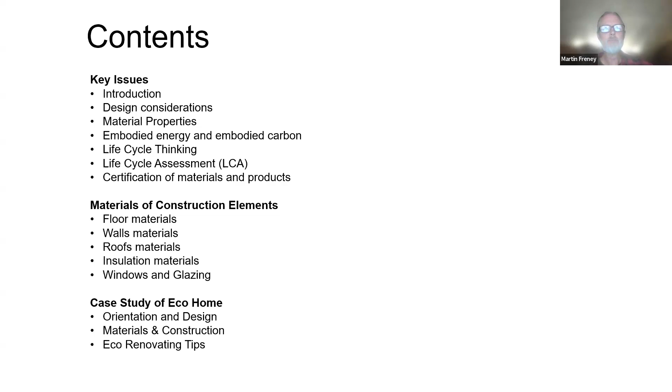To start with, it's good to acknowledge that in the past, people built with what was available. These days we've got a globalized economy where we can get materials from all over the world. But building with local materials, the materials at hand, is indeed a very ecological way to build. I know what you see on the screen doesn't seem very practical, but you can indeed, even these days, build with local materials. I'll give you some examples as we go through.

This presentation is about materials, and I'm not going to talk too much about design, because there are other webinars on that topic. But I will touch on it from time to time, because it's almost impossible to talk about materials without talking about design. So I've got some questions here: what will we build, and how will we build it?

We can't talk about design without talking about the designers, which are you and me. We all have ideas about how we want our homes to be and what types of materials. These decisions we make have a massive impact on things like the cost of the home, and in particular, a really important one: how much is it going to cost to run? Of course, how much is it going to cost to build? But also increasingly, people are thinking about what are the ecological impacts, and that's what I'm going to be talking about a lot tonight.

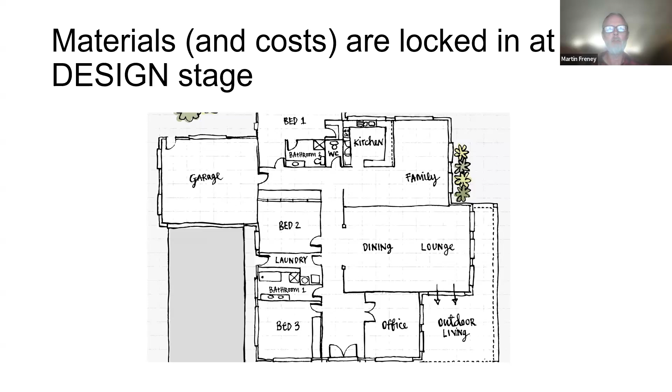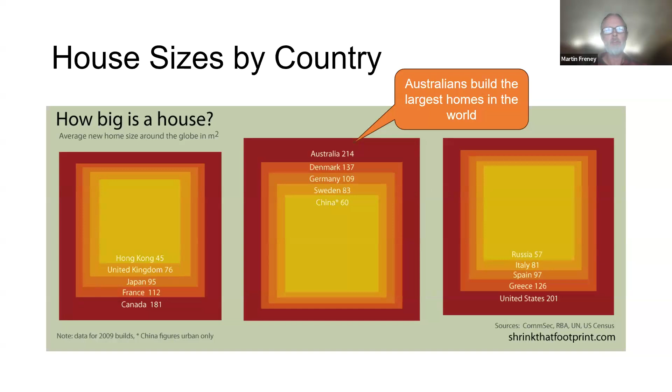That's approximately a third of the size of our homes, so please keep that in mind. Important to understand, big houses need more energy to heat and cool, and of course they need more materials to build and cost more to build. So if you are on a budget, it does seem to make sense to consider this size issue.

All right, so design and approval. There's a team of people working together to get you approval for your build, and this is where materials are going to be locked in. All of these people are going to have some impact on the materials you choose, whether it's the energy assessor having specifications for your glazing, hopefully double glazing, or the structural engineer specifying the strength of the timber or the steel.

So it's kind of a team approach, and these materials, it's a little bit out of your control as the owner of the building, and you'll need to take the advice of these experts on what are the right materials for your home. But right from the beginning, you can start out by saying these are my preferences for the types of materials I want you to work with. An example might be, do you want a timber framed home or a steel framed home?

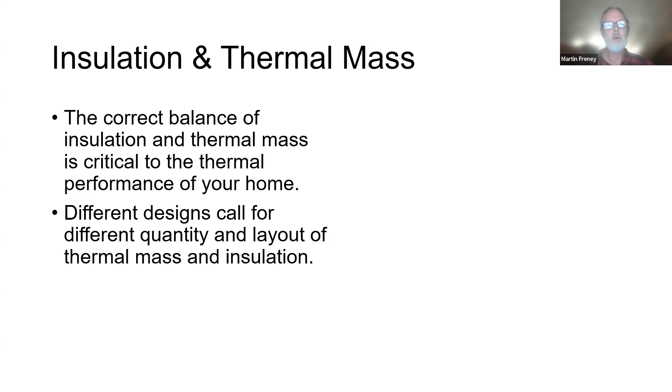Now, perhaps one of the most important material properties is this concept of insulation and thermal mass, and they're really at opposite ends of the spectrum. Insulation and thermal mass are really the ingredients that are going to determine whether your home is energy efficient and therefore nice to live in without relying too heavily on things like air conditioners. Different climates and different designs are going to call for different amounts of insulation and thermal mass, and indeed the construction codes and standards are going to specify minimum amounts of insulation in particular. So let's have a quick look at these two things.

So insulation, I'm sure most of you are familiar with this concept that it slows down the flow of heat. It's good to understand that heat flows from hot places to cold places, so if it's warm inside and cold outside, the heat's trying to escape. It's measured with something called R value and also U value, and I'll explain these two things as we go along.

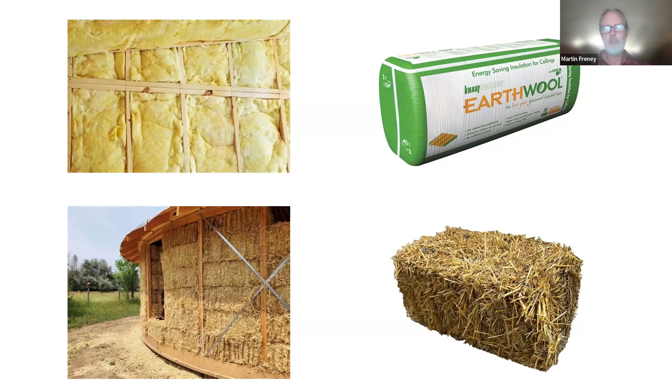Obviously, the conventional insulation material that you can get at any hardware store is shown at the top there. Thankfully this fiberglass insulation wool is made from a lot of recycled glass these days, so that's terrific. But down the bottom, I've shown a straw bale home, and a straw bale is really terrific insulation, partly because the walls are so thick. We'll explore that a little bit more as we go along.

So we've got the fiberglass wool, also a similar product that goes in the roof, often with a reflective foil called a roof blanket. There's also rigid insulation, such as polystyrene foam, which might also have a reflective layer on it, and that may go under your floor.

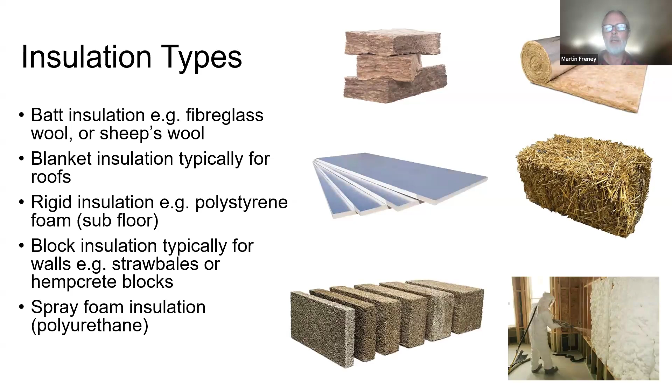Straw bales or hempcrete blocks are alternative building materials with a very low eco footprint. And spray foam insulation is another possible way to insulate walls, floors, and ceilings.

Another thing to understand is that if you halve the thickness, going to 25, you halve the R value. It's directly proportional to the thickness. So thicker insulation is better—twice the insulation will give you twice the R value.

Another thing to understand is that the U value is just the opposite of the R value. If you do 1 divided by R, that gives you the U value. So what we're looking for is small numbers for the U value and large numbers for the R value, giving you the better result. The U value tends to get used more for glazing, so when we get to the windows, I'll remind you about this.

One other thing to understand is that in America, if you're Googling and finding information about R values online from somewhere that uses imperial units, it's going to sound approximately 6 times better. So don't get fooled by that.

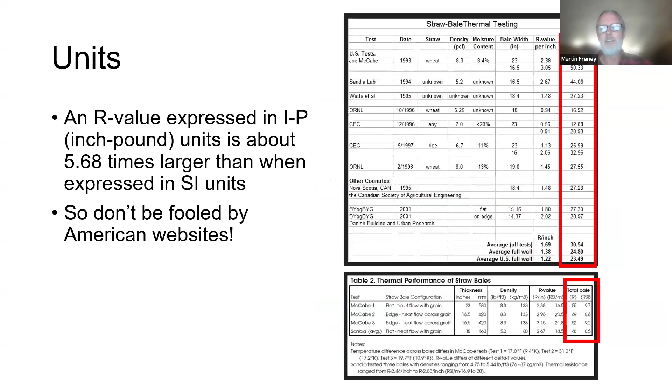Insulation is the kind of thing that can get skipped over. So in your project, make sure you supervise the builders. Make sure they're doing a really good job at making sure there are no gaps and that the insulation is not crushed, because if it gets crushed it will lose its R value since it's not as thick as it was meant to be.

A really wonderful resource for everyone is the yourhome.gov.au website. It's a government website all about how to design a great home, and there's of course a lot of information there about insulation—more great resources for you.

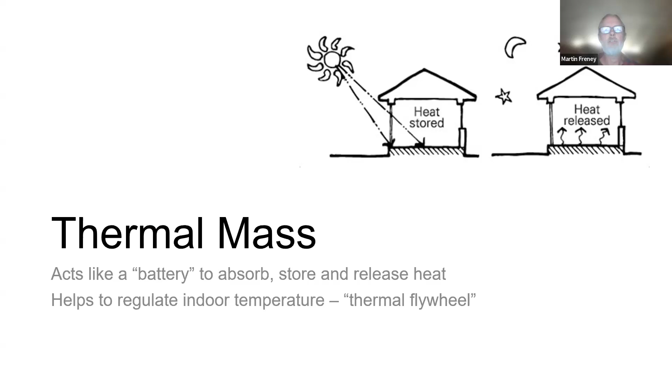Thermal mass is the other one that I feel is a little bit less understood and not utilized as much in Australia as it could be. The idea of thermal mass is that you can store energy and release it later on, so it acts a little bit like a battery. Thermal mass includes things like concrete in a floor, fired clay bricks, mud bricks, rammed earth, and even water is thermal mass.

I've even heard of buildings that have rainwater tanks built into them, typically a concrete rainwater tank, which is also thermal mass. The idea is that thermal mass can store the temperature collected from the sun, for example, or it might be collected and stored in the water, in the example of the water tank house.

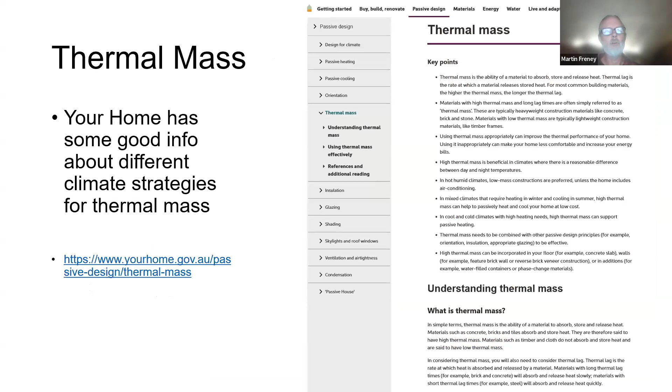Really what designers try to do is combine these two materials in an intelligent, logical way—letting in the sun in the winter but not letting it in during the summer. That's all super important, but how you arrange these materials so you get a good outcome is the trick.

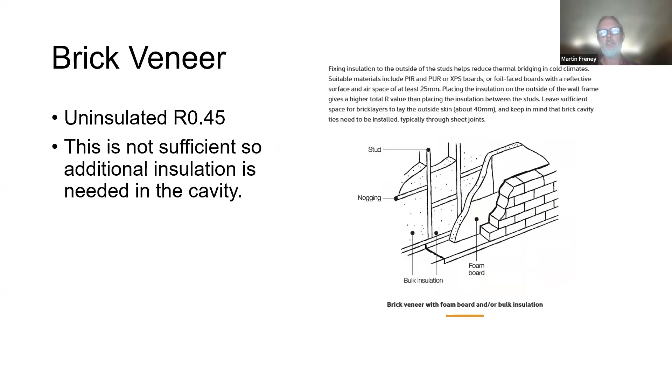A few more images here from the Your Home website. If you've just got a brick veneer wall that's uninsulated, it only gives you R0.45, which is not enough to satisfy code. So some other layers of insulation are a good idea. It's the same with cavity brick, and solid walls are also typically not going to meet code. Well, not typically, they just won't meet code. So some other type of insulation is very important.

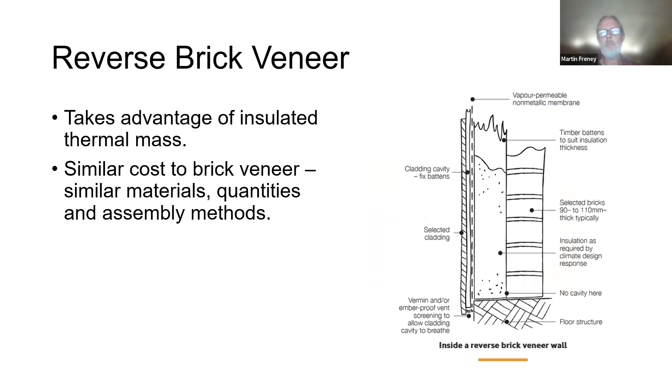And then there's the reverse brick veneer again, which I think is a really great way that a conventional builder can get a great outcome. So if you've got a renovation project planned, talk to your builder about reverse brick veneer. In summary, insulated thermal mass is a good design strategy in many climates. Ask your designer about the strategy to minimize heating and cooling requirements.

Okay, eco impacts. How to reduce the eco footprint of construction materials. We've got really quite good at reducing the operational energy, or the heating and cooling energy to run a building, by using some of these techniques I've just been talking about. The next big challenge is how do we reduce the embodied energy of the construction materials?

As I explained before, that's the energy required to manufacture those materials. And what's more, we also need to think about the end of the building's life, because we don't want to create this problem 50 or 100 years down the track where we're trying to figure out what to do with these buildings that might end up in the landfill if we're not careful. A better idea is to do what's called the circular economy, which is where we upcycle materials in an ongoing loop and bypass the landfill, simply making new buildings out of the old buildings.

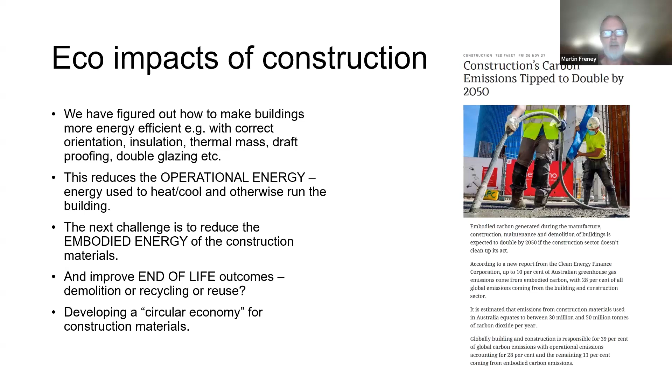So an important concept to understand is this life cycle stages idea, where you're thinking about raw material manufacture, construction on site, the operation of the building throughout its life. That's typically the heating and cooling energy, but also things like maintenance. And then its end of life when it gets disposed of. Throughout all these stages, we also need to be thinking about transport. That goes back to the very first slide of the indigenous housing, where I mentioned this idea of how do we use local materials instead of trucking or flying materials right across the planet.

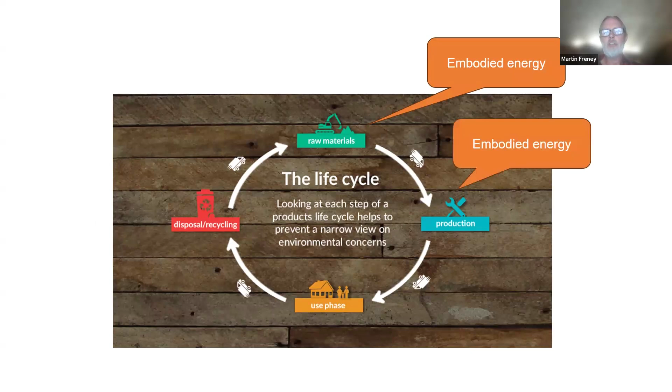So, life cycle thinking. Here's a diagram which illustrates that during raw material manufacture, we've got embodied energy, same during production. The use phase is the operational energy. There's also embodied energy when we demolish the building. And if we can take those materials and turn them into raw materials again, then we've got the circular economy. Note that the transport energy is everywhere.

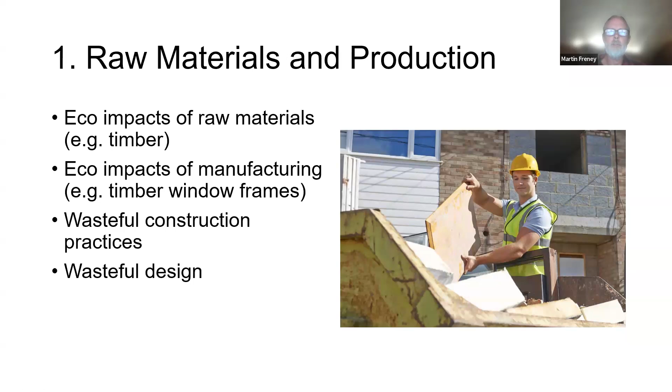So number one, raw materials and production. We can probably have the most impact here by eliminating wasteful construction practices. The illustration here of the skip bin filling up is an example of perhaps a slightly dysfunctional manufacturing system. So maybe prefabricating components and having them delivered to site could avoid some of this.

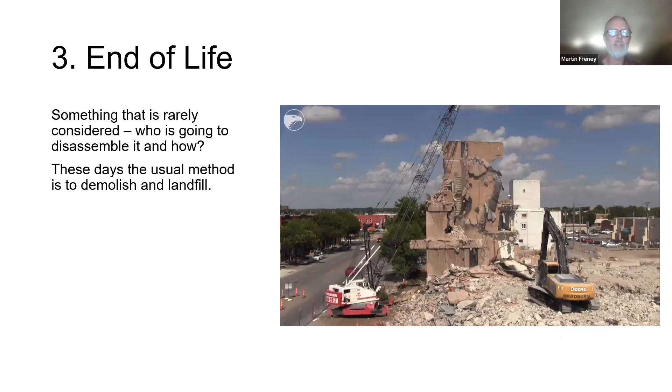So consider prefabrication. The use phase, or occupancy, we all want to decrease our energy bills and water bills, etc. So of course, this is where design and correct material selection comes in. End of life - I'm sure we don't want to see this kind of rubbish occur at the end of the life of the building. So to help get you thinking about this whole issue of life cycle of materials, I just want to do a quick look at timber.

First of all, of course, we have to grow a tree. And this is actually going to get more difficult with climate change - things like droughts, erratic weather, and not to mention the fact that we're clearing forests at an alarming rate, not only in Australia, but on a global scale.

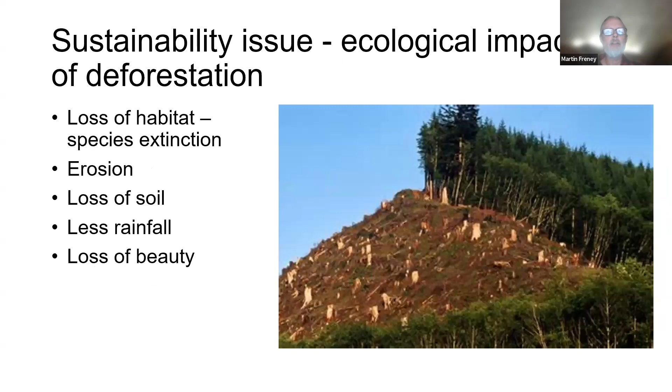Then we have to turn that tree into a material. And of course, there are problems with that as well - social issues as well as sustainability issues, massive amounts of transport, pollution. There's also, of course, the energy required to mill the timber, kiln dry the timber.

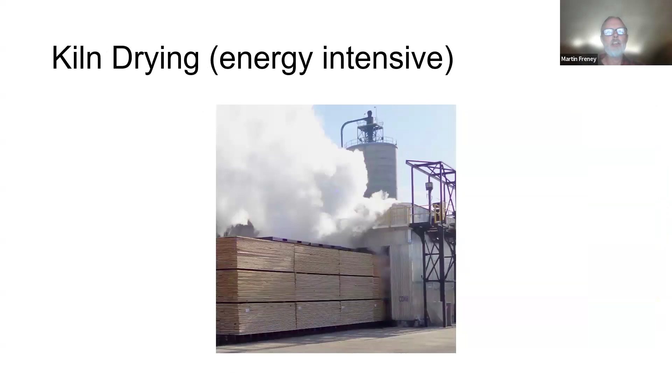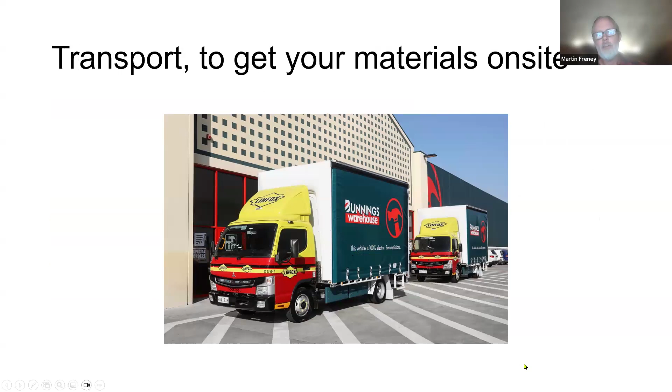Perhaps a more ecological thing would be to air dry the timber. Maybe even more ecological would be a solar kiln, but perhaps not very commonly available. Then there's ongoing energy required to safely store the materials, transport the materials to your site. The point of this picture is that it says here this vehicle is 100% electric, zero emissions. So there are good initiatives like that to start addressing the eco footprint of transport. Then we've got waste during the construction stage.

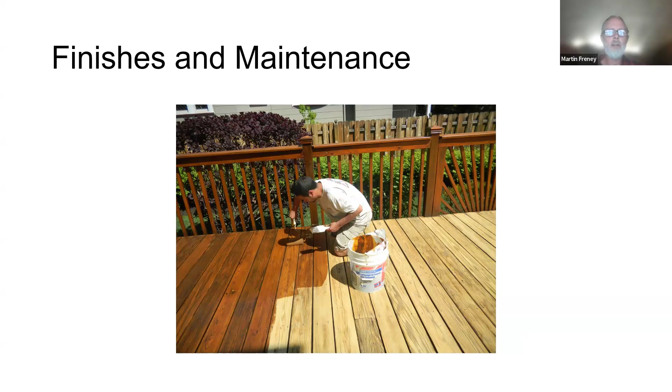So in summary, there's lots of opportunities for us to influence the ecological, economical, and social outcomes just by thinking through these life cycle stages.

So some examples here: can we get FSC certified products instead of getting old growth timber? Can we avoid the waste on site? Can we ask the builder that, we'll let them know that this is really important to us and we don't want to be paying for skip bin after skip bin to be emptied - or prefabrication may be the solution there.

During the use stage, can we specify eco-finishing and maintenance products, which perhaps use natural ingredients rather than petrochemical toxic ingredients? And at end of life, can we design for disassembly?

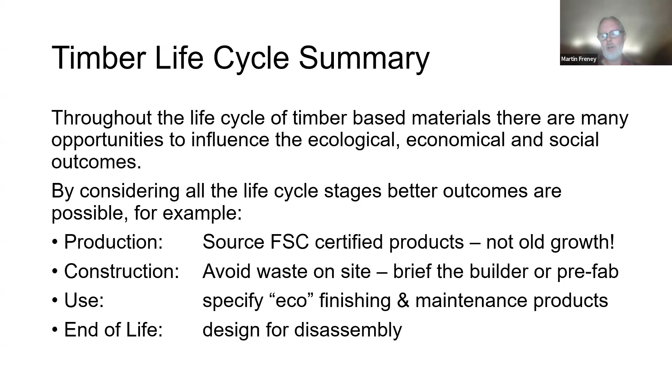So just having a little bit of an idea of this - you can think of it as the pollution factor and the eco-destruction factor. This is a good thing to have in the back of your head. It's not something that gets talked about a lot in the building industry, but over the years to come you'll see this become more and more a part of even how you get approval, because you'll need to demonstrate that you've considered this issue of embodied energy.

And embodied energy ties in closely with this idea of life cycle assessment, but it goes beyond embodied energy and starts thinking about the impacts to water, land, and air, and even toxicity to humans.

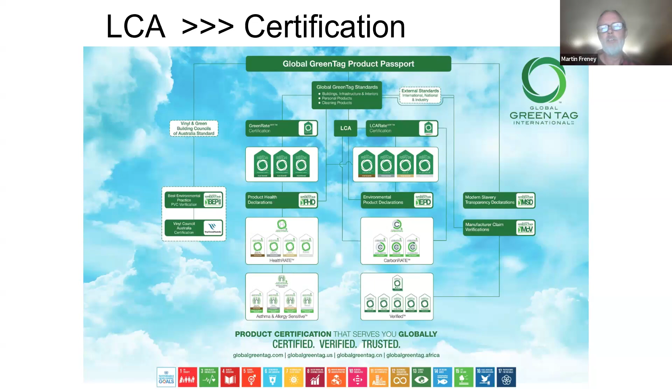Where it does get used right now is in certifying products. You'll see right at the heart of this flow diagram it says LCA, life cycle assessment. And so by doing a life cycle assessment, you really can judge how ecological a product is - this is how you can actually get your product certified in this case.

Because I guess the unfortunate thing is there's a lot of greenwash out there. There's a lot of people just outright lying or not being completely honest about how green their products are. And so if they've gone through this process, then you can be reasonably sure that you're getting what you think you're getting, which is an eco product.

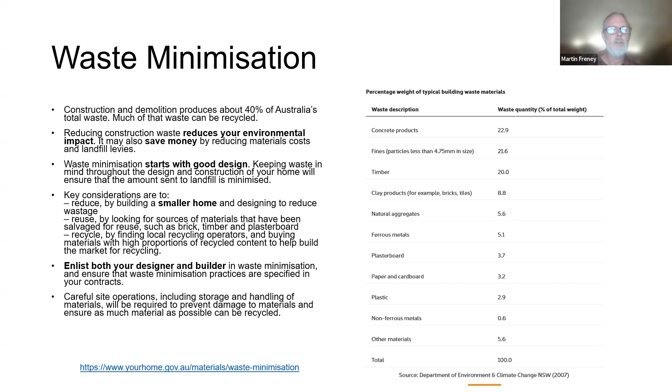Another thing you can do is salvage materials. It's not necessarily easy or cheap. The problem I've personally had is once I've found a pile of materials I want to incorporate into my project, you have to store them safely and keep them protected from the weather. There's also issues with compliance. For example, if you're trying to salvage windows in a bushfire risk area, they might not be made out of the right timber. So I think the easy thing to do is get some secondhand fixtures and fittings, which should be relatively easy, rather than looking at things like windows and doors and structural elements.

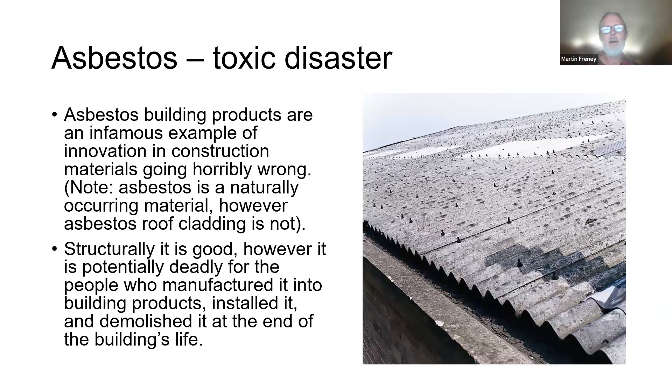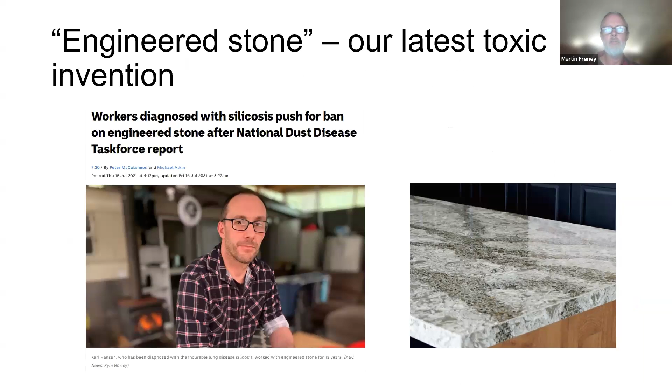Moving on to toxicity and safety. I've thought about these stages: the construction stage, where we don't want builders getting sick; living in the home, where we don't want you getting sick; and demolition, where we don't want that causing toxicity and safety issues either. We're all familiar with asbestos. Aluminium cladding has been one of the latest disasters, and engineered stone is the most recent one to raise alarm, and they're actually phasing this product out, as I understand it. So good to be aware of that, and perhaps avoid specifying it for your new countertops.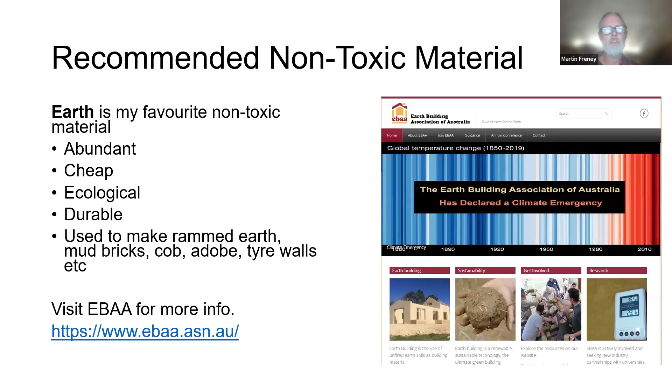This is why I'm a big fan of natural materials, and earth is my favorite non-toxic material. It's highly abundant, cheap, and it's probably got the lowest embodied energy of any material there is. It can be very durable depending on how you form it. Rammed earth walls, for example, have lasted for hundreds if not thousands of years. There's a really great organization called the Earth Building Association of Australia. They run conferences and workshops, and have some good information on their website about how you can build with earth.

Another thing to understand is that these materials come as systems. A concrete slab is not just a concrete slab — inside it, there's steel reinforcing. So once you decide upon an idea that you want a concrete slab, that leads to a whole suite of materials that are almost a little bit non-negotiable.

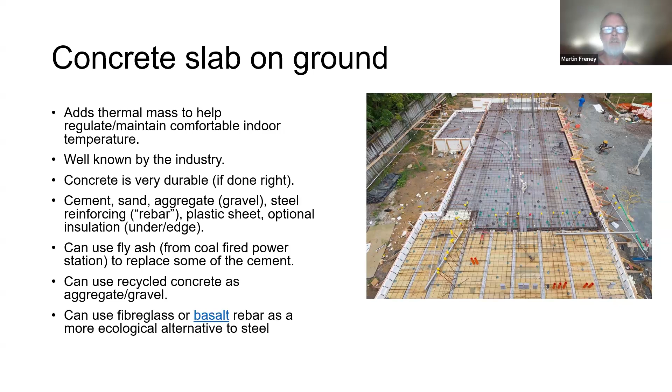Here's a concrete slab under construction, and there's a lot to be said for one. One thing I really like about them is that they add thermal mass to the building, and in most climates that's going to be a real asset for helping stabilize internal temperatures. These days you can also request eco concrete — here I'm linking you to an article by Renew which explains this concept, and some of the larger suppliers are now providing it. Basically, it uses waste products from coal-fired power stations and steel furnaces that act like cement, so you substitute the cement with these other products, and that reduces the eco impacts.

Another great thing about concrete slabs is you can put water pipes in them to create what's called a hydronic heating system, or you can put in electrical heating elements. As far as I know, hydronic floor heating systems are more energy efficient. You can also put different finishes on the slabs — I prefer the example of polished concrete, because that leaves the thermal mass exposed and ready to soak up any sunlight that may be hitting it. By covering it over with timber, you tend to negate some of those thermal mass properties of the slab.

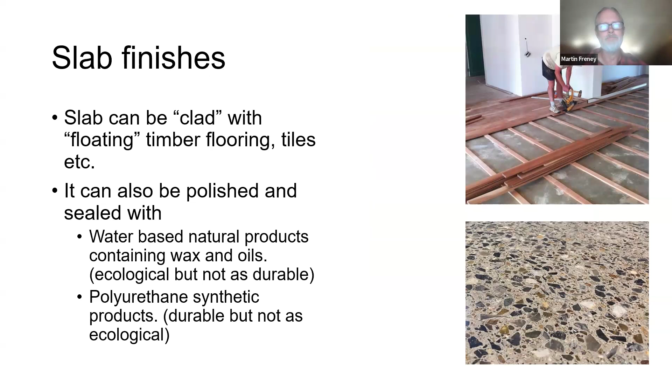The other common construction method is the timber framed floor. Hopefully it's obvious that that is not thermal mass, and this may be more appropriate in the tropics, where flooding is more likely to occur. That all makes sense to get the building up off the ground on some stumps or posts. That lighter weight construction can be better in the tropics where it's important that the building can cool off at night time quickly. So too much thermal mass in the tropics can be a bad thing.

And of course, get your termite solution right if you're building with these materials. Keep in mind that a lot of these timber products can be termite treated, but that involves a lot of toxic chemicals.

Timber is, of course, very beautiful and renewable. We can grow timber. We can't grow more steel - there is a finite amount of iron ore in the ground. So I love renewable materials because we can just grow more and more of them. And the challenge then is we need to plant more trees than we cut down. That's where the Forest Stewardship Council can help with certification of timber that does come from those sustainable sources.

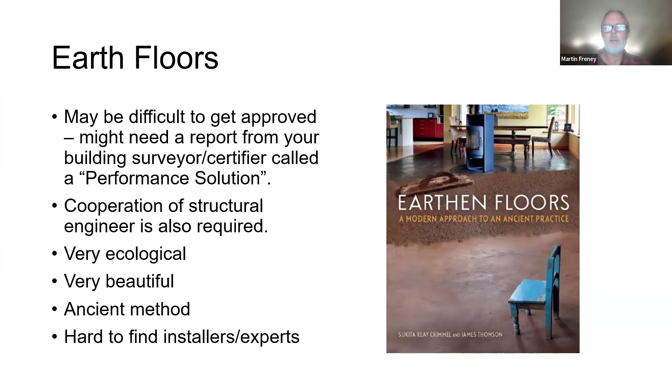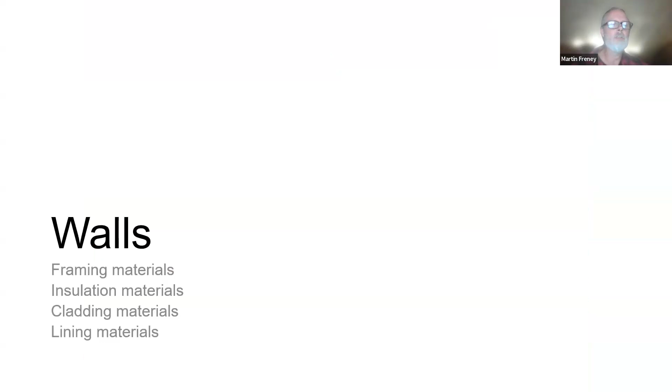All right, so moving on to walls, looking at framing materials, insulation materials, cladding materials, and lining materials.

The two main options are steel framing and timber framing. These days, the steel frames tend to get prefabricated and it gets built fairly quickly on site. One of the downsides to steel framing is that if a window is changed size or something like that, it can be a bit tricky to make modifications on site, whereas a timber frame is that bit easier.

So another huge advantage is the termite issue. If you are building with timber, make sure you've got your termite control strategy figured out. It is an easier material to work with. It can also be prefabricated and get erected on site very quickly. So there is no clear winner with timber framing versus steel framing.

I think it's best to talk to your builder and see what they prefer to work with. Perhaps one thing I do like about timber is that it's insulative, so you don't have problems with thermal bridges, which is where with a steel frame you get heat conduction out through the roof in particular. But of course, there are ways to mitigate that, so as long as you're aware of that issue, you can control that problem.

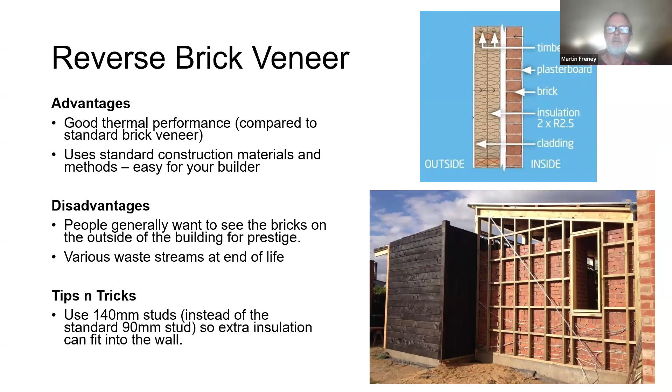So here's the reverse brick veneer again, and I guess the tip here is to use 140 millimeter studs. Usually they're only 90 millimeter, but that 140 millimeters gives you more room to put insulation in the wall. I think that's a good bit of advice - go for the thickest stud. Even if you went up to 120 mil, that would be better than 90.

All right, so moving on now to a more alternative material, hempcrete. Hempcrete is an interesting one because hemp is a very ecological material. We're now allowed to grow it in Australia, and it's just good for so many reasons in terms of how it's grown. It doesn't require a lot of pesticides or fertilizers.

And when it's formed into hempcrete, basically a lime binder is used to glue all the little hemp particles together. It creates a very well insulated wall. They tend to be about 300 millimeters thick, so you do lose a little bit of floor space. And you can do some interesting things with actually not rendering the wall and leaving the hemp exposed and putting some colors in the mix as you're mixing up the hemp to leave an interesting aesthetic.

One of my favorite materials is straw bale, and I would say that these walls probably have some of the best insulation around, but that's kind of because they're so thick. Straw bales come in this very large format, so the walls end up being about half a meter thick, and the straw is excellent insulation, and of course it's a waste material from agriculture, so that really reduces its embodied energy and ecological impacts.

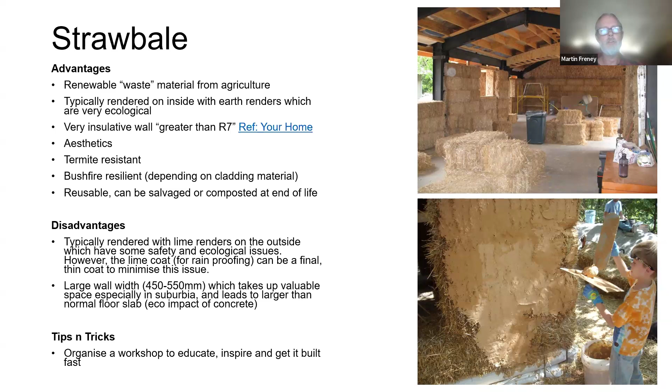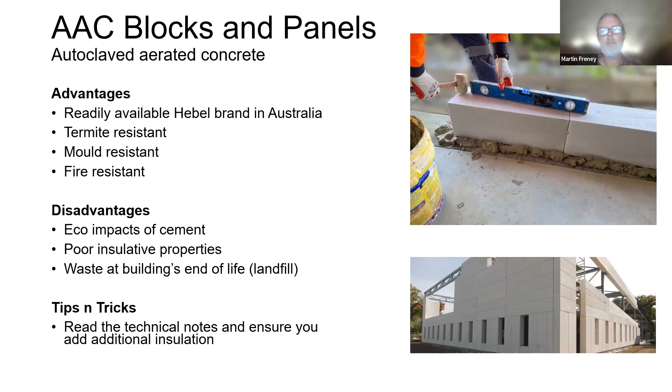In a similar vein, we've got autoclaved aerated concrete. It's better known in Australia as Hebel, and that's a similar sort of concept. The aircrete is a bit more DIY, but these blocks, of course, can be delivered to your site. I'll just flag the poor insulative properties - you do need to add some other layers of insulation to that. But it's a very common building material, and not too bad because it is aerated, so it's not as much reliant on the cement.

One of the potential downsides to this system is that there is a lot of material in there that has to be trucked to site. Typically you'd be lucky if you can use the material that's actually on your site, which is sort of how it used to be done in the good old days. But now with higher standards for structural engineering, quite a bit of cement and steel ends up being buried in the wall to make sure it complies with code.

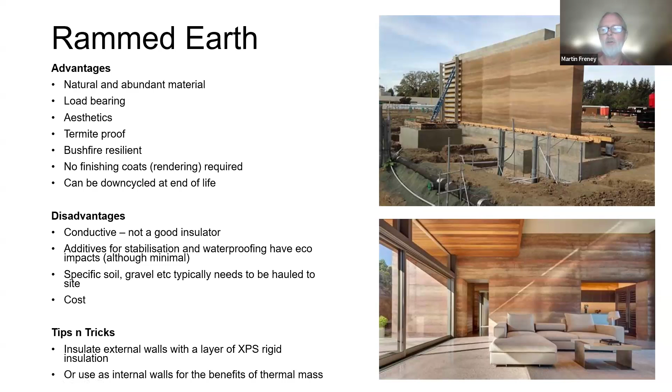But I still think this is a really terrific way of building. And my tip here is that you can embed a layer of insulation inside the wall. That's what they do in Canada, where it's very cold, and I would recommend that here as well, just to comply with the new 7-star energy minimum rating. The other thing to do with these walls is just use them inside the building for thermal mass. So use, say, a straw bale wall for insulation as an external wall, and the rammed earth as thermal mass inside the building. And I would make that recommendation for the mud brick as well - another ancient construction material, very ecological, but it will require extra insulation to come up to code unless it's an internal wall.

Now, this is my absolute favorite, and here you'll pick that I'm a bit of an extremist. I love these tire walls, and what I mean by bermed is that they get backfilled. So behind the tires, we mound earth up against the wall, so it becomes a retaining wall, and this becomes the ultimate protection from bushfires and also extreme temperature, because the soil is at a stable temperature, and of course the soil is non-flammable and can protect you from bushfires.

In the bottom image there, you can see a tire wall. It's all been rendered over with another super sustainable material, which is an earth render, so that hides all the tires away. I just love the concept of working with waste materials - the tires are a problematic waste material, you get them for free, you fill them with earth, which you can also get delivered to site for free. So I just really think this is a wonderful solution.

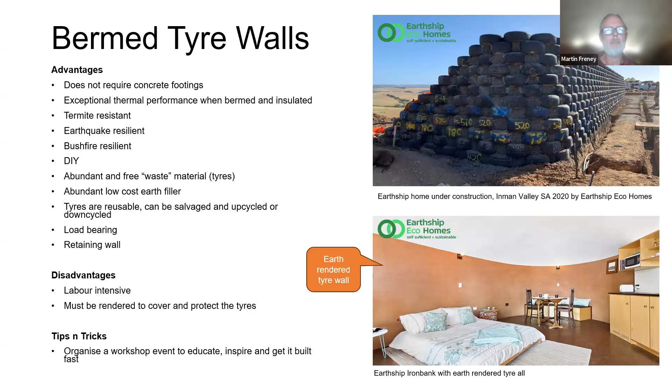Super adobe and sandbags is actually a similar concept to the tire wall, in that you're using some sort of container to contain the earth. In this case, some sort of polythene bag, and they tend to get used for dome-like structures. They work really well in that scenario, but you don't have to do domed structures.

Moving on now to panels, cladding, and lining. Cladding refers to the exterior layer of your wall, and the lining is the interior lining to your wall.

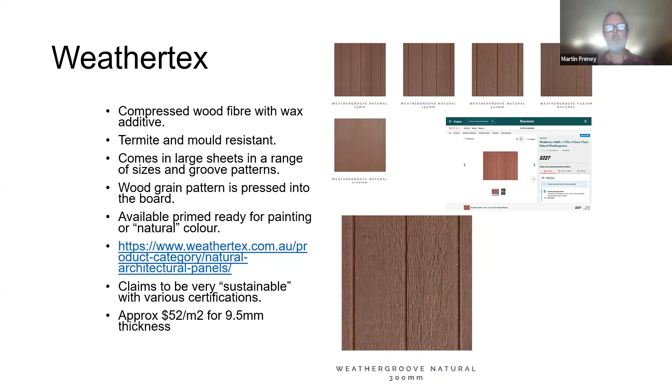Weathertex is a relatively new one that is quite sustainable and readily available. You can get it from Bunnings, and I'm sure other hardware stores. It comes in all sorts of patterns, basically stamped into the material, which is compressed wood fiber, termite and mold resistant. It's gone through that certification process and got a global green tag certificate. I'd recommend that one.

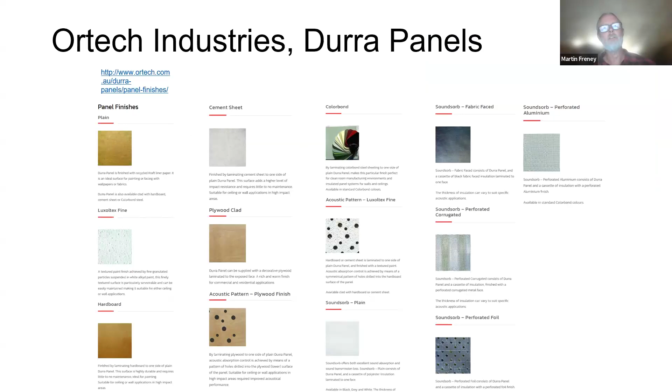Durra Panel is a straw board. You can use it for walls or ceilings, and it comes in a whole range of different finishes that sandwich the straw. I'd highly recommend that one. It's also got some good insulative properties because it's made of straw.

Another straw material for the ceiling - back in the 70s, I think a lot of beach houses had this straw ceiling in them. My parents had one of those beach houses, and that straw board is hanging in there. It's still going strong. It really hasn't degraded at all over about 40 or 50 years.

So these natural materials can be very durable. Another example here, salvaged floorboards can be very durable.

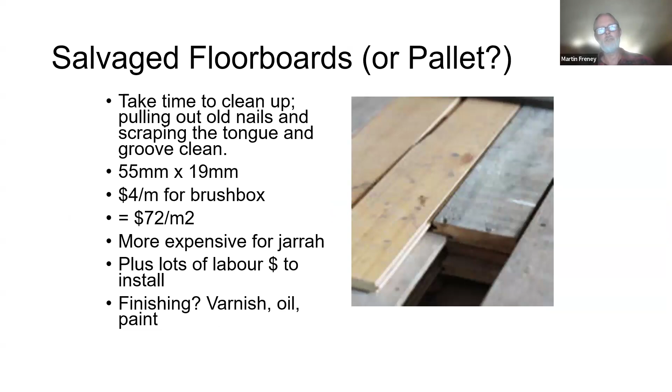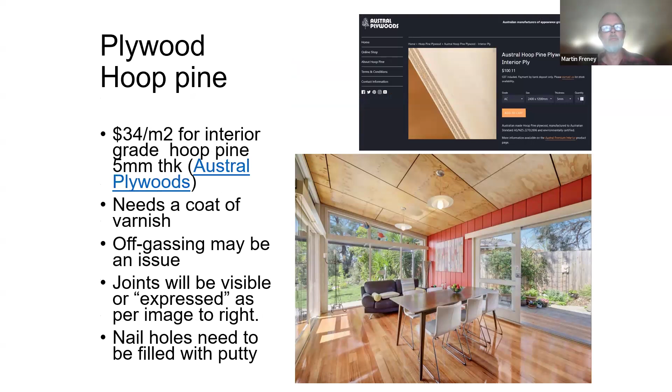Mini orb could also be used for walls and ceilings. Custom orb is also another option - custom orb or corrugated iron is the other generic term. And plasterboard, of course, is the go-to that most builders will do by default.

I don't know if you've been paying attention to the per square meter costs, but this one is the lowest. And it's no surprise that the material that is most common is the cheapest one. Unfortunately, though, not great for end of life - a lot of it ends up in landfill. But also not terrible. I think the trick is to insulate your wall well, and some gyprock is not to be sneezed at.

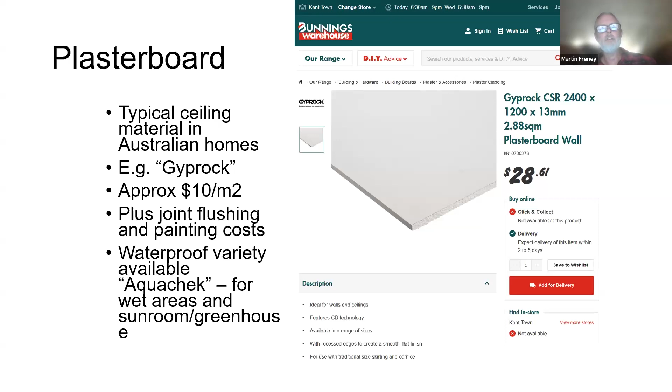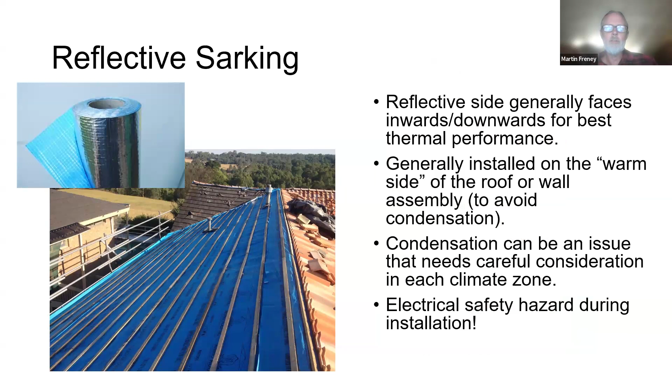Sarking membranes and wraps, reflective sarking, and the roof - this stuff is actually getting phased out because it causes problems with condensation, and a much better material for your project is going to be a vapor permeable wrap, which is part of the system in passive house, the German passive house system. The great thing about these wall and roof wraps is it lets water vapor out.

The moisture from cooking and showering and doing laundry in the house creates high humidity inside, and that needs to escape. What tends to happen is it then condenses on the underside of the roof, which is cold, and then it drips back down onto the insulation. So if you've got this layer of vapor permeable wrap, when it drips back down onto the wrap, it can't get through, and it just runs out to the outside of the building.

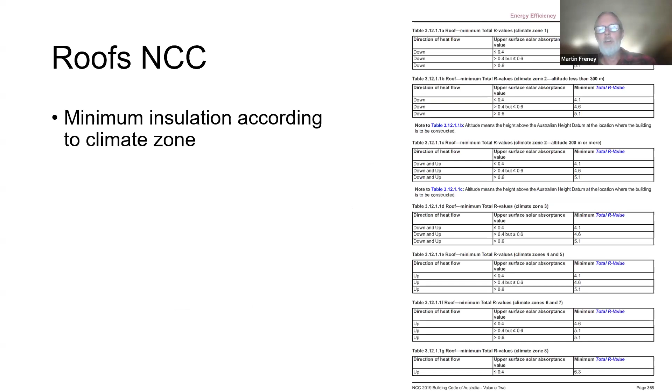An important thing to understand is that the color of the roof is going to impact the energy efficiency of your home and the star rating of your home. So lighter colors with this absorptance value are better. You can find that the solar absorptance value, SA, is given for all these Colorbond colors. Keep that in mind when you're thinking about the color of your roof.

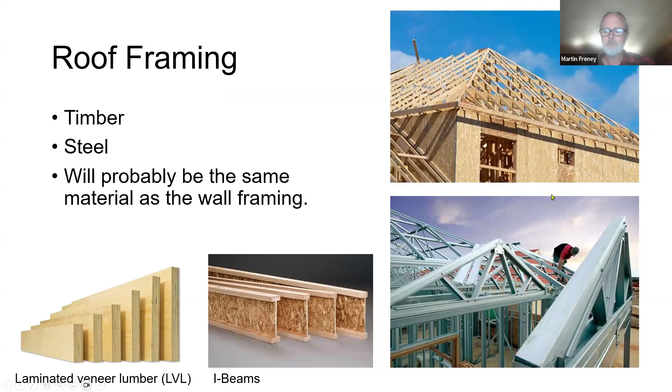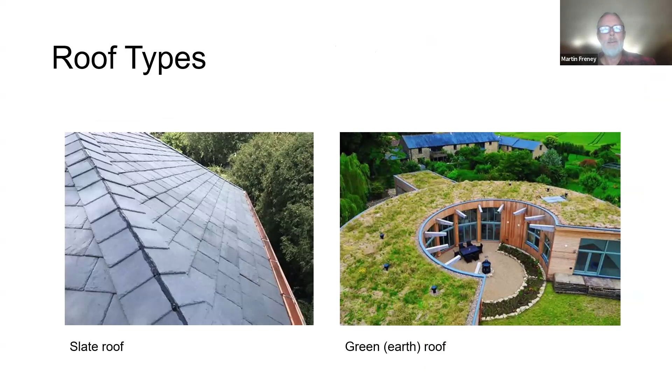Earth roofs are really great for biodiversity. Birds like them, and they're also really good for bushfire resilience, especially the extensive green roof where you're not growing massive plants on them, just a small bushfire resistant ground cover. On my earthship roof, I just have gravel, so perhaps not great for biodiversity or attracting birds, but absolutely fantastic for bushfire resilience.

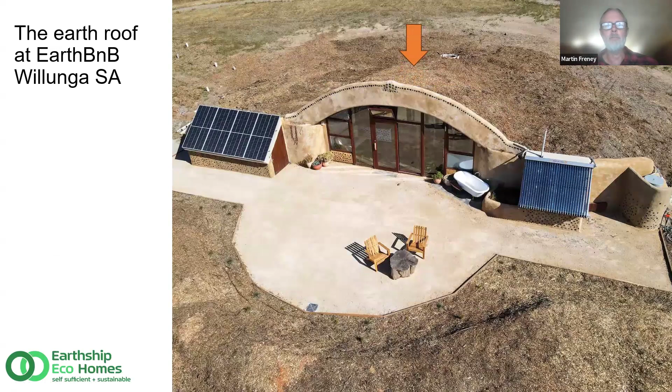This is not my earthship, it's another one of my projects, but you can see the earth roof really blends in with the environment and it's not a bushfire hazard, and it's got some really great energy efficiency outcomes as well.

Windows and glazing. I'm not here to talk to you about design so much, but the one really important thing to understand is that facing the windows to the north is the smart thing to do, unless you're in the tropics. But I know all you people listening tonight are not in the tropics, so face your windows north and try to avoid putting them elsewhere. You might want to do that to get some views - if that's the case, try and make them smaller windows with good shade overhangs, good eaves.

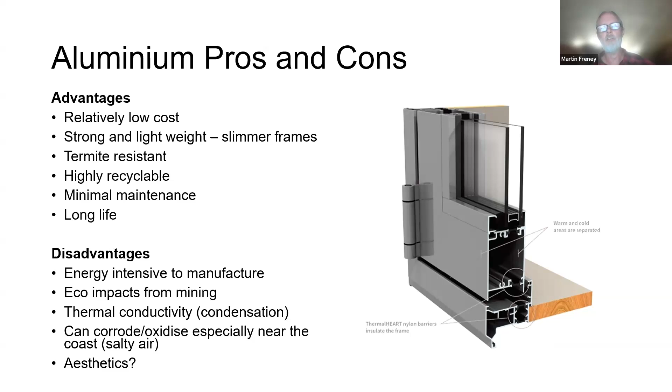But for my talk on materials, let's look at the options for window frames. Basically, aluminium tends to be the budget one, but not so great when it gets really cold and you get condensation forming on the inside. So you can get hybrids of timber and aluminium where the aluminium is on the outside, protecting the timber from the weather, and this really improves the thermal performance of that window frame, so you don't have heat coming in and out through the frame.

In this example here, you can actually see a triple glazed window, 3 layers of glass, and there's kind of no point having that triple glazing or double glazing if there's a lot of energy moving through that frame. So this is going to cost a little bit more though.

You can also get plastic window frames. UPVC is the material - just think of it as PVC - and the main idea of that is to stop that issue with heat loss. They're also quite economical. There's always an upside and a downside. So the downside is that they're perhaps not so great in a bushfire, because the plastic is going to melt at a lower temperature. But often they have, what you'll notice in that one, steel sections in there which give it a bit more structural integrity during a fire.

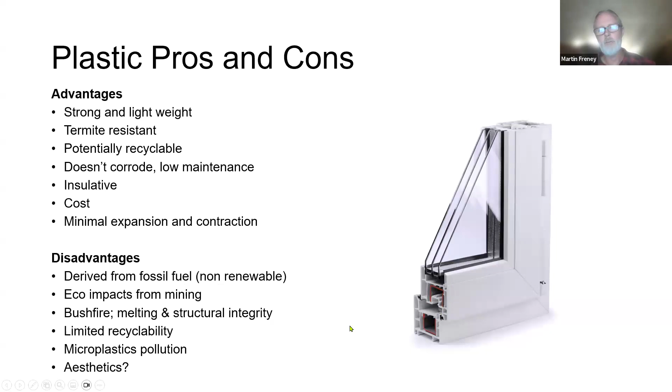Another idea on window frames is this product called magnetite. Basically, it's a retrofit solution where you can just magnet on another layer of glass. So this is how you can retrofit double glazing rather than ripping out all of your existing windows. You can just magnet this on, and even if you've got timber window frames, there's a frame installed that this one can magnet onto.

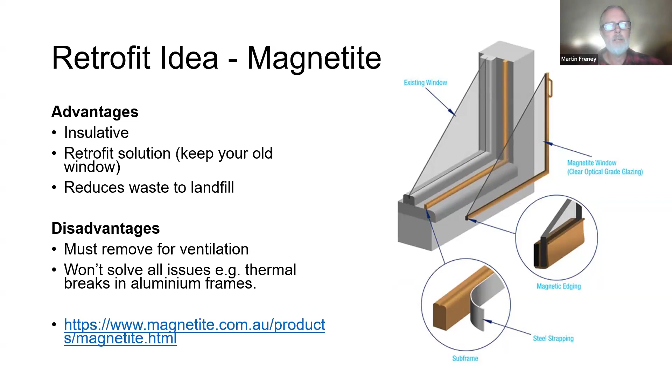So yeah, I think that's a really interesting idea. All right, so...

Now thinking about the window as a whole, not just the frame, but the glass as well. There is this system called WERS, which you can log into and figure out what the insulative value of your window system, frame and glass is.

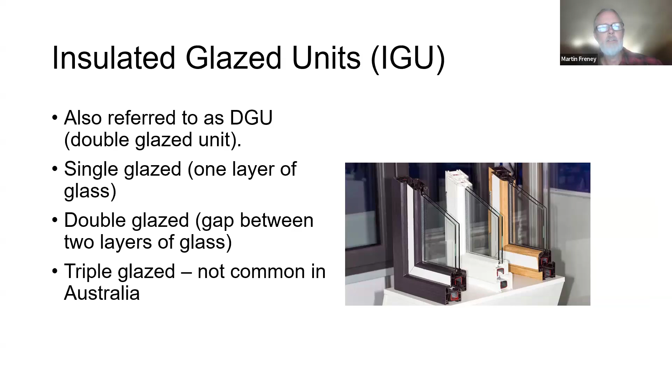Hopefully you're going to have a double glazed unit or an insulated glazed unit, so IGU and DGU kind of mean the same thing. Triple glazing is not very common in Australia, so if possible, if you're getting new windows, go for double glazing.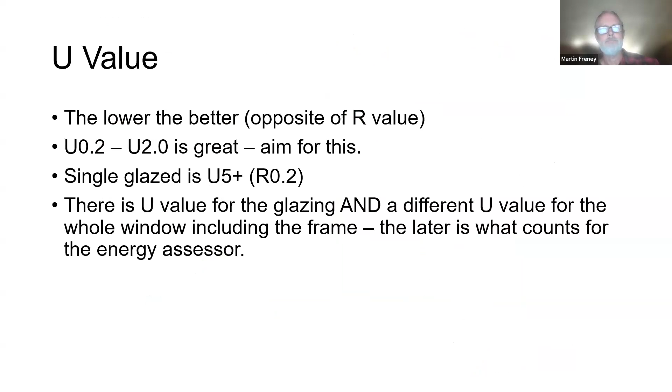It's also good to know that there are all sorts of different types of glass. It can just be clear glass, or it can be tinted with some kind of nano film, so this is often called low E or low emissivity glass. You can have it tinted in other colors. It can be laminated for strength, which is maybe how it gets its color, but also for energy efficiency. And it can be toughened for bushfire zones or low windows that you might crash into and hurt yourself if it's going to break into really sharp pieces.

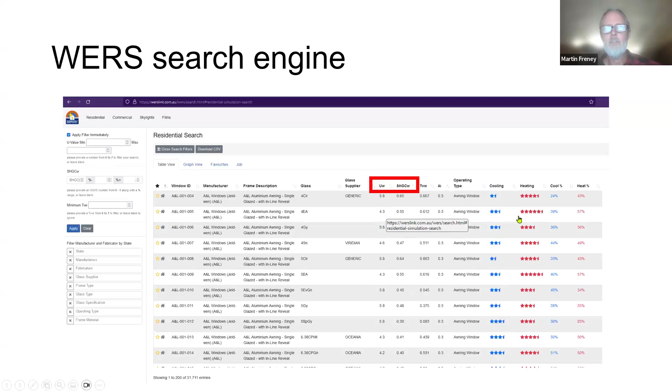Here's a screenshot of the WERS search engine, where it actually lists a whole range, hundreds if not thousands of windows that you can buy from window manufacturers. You can then look at that U value, the solar heat gain coefficient value, and start comparing. It's even giving a star rating for cooling and heating.

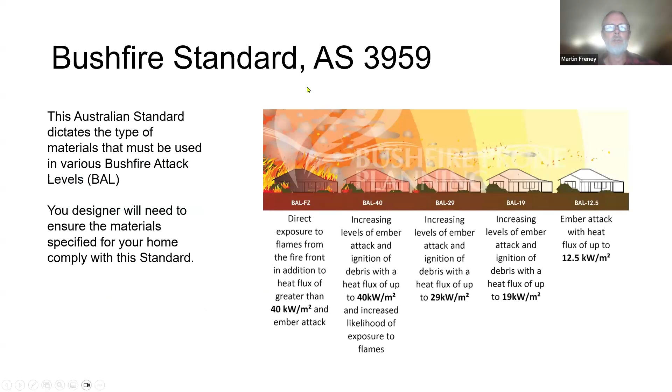You'll all get a copy of this presentation, so you can refer back to this. The bushfire standard also has some important information about the timber that can be used for window and door frames, so if you are in a bushfire zone, you'll need to pay attention to this standard. Unfortunately, the standards are all hidden by a paywall, so the Australian Glass and Window Association does have a really good guide to that standard, so you don't have to buy the standard.

I'd just like to spend the last 5 or so minutes looking at a case study. It's inspired by the Earthship concept, which I like to think of as passive solar design on steroids. This is where there's really no compromises, and basically all the windows are on the north side where they should be. This is a 2 bedroom, 1 bathroom building on a small suburban block of land that cost about $400,000, including all the off-grid systems.

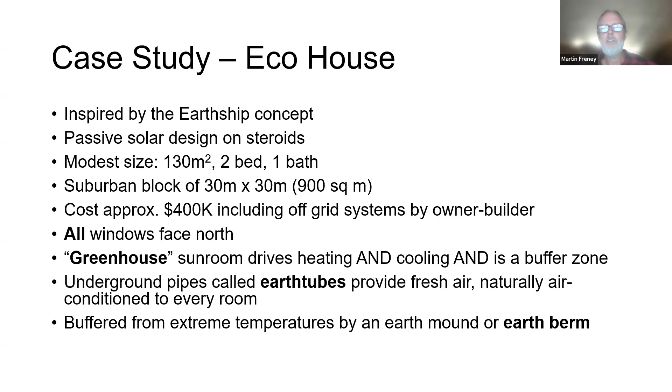All the windows face north, and what's more, there's a greenhouse or sunroom on that north side, which is kind of like the solar heater. Interestingly, it works as part of the cooling system as well, by drawing fresh air through underground pipes called earth tubes. There's also the earth mound at the back, which also buffers from extreme temperatures.

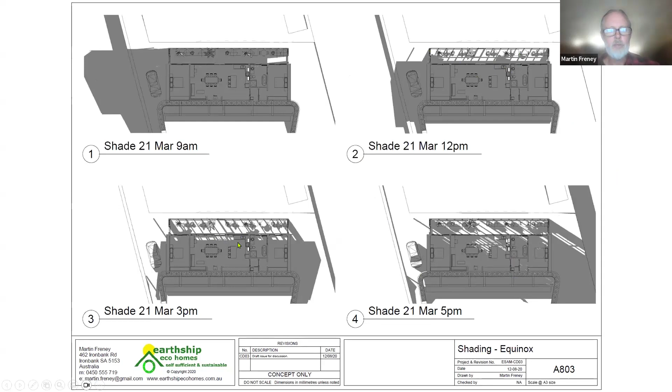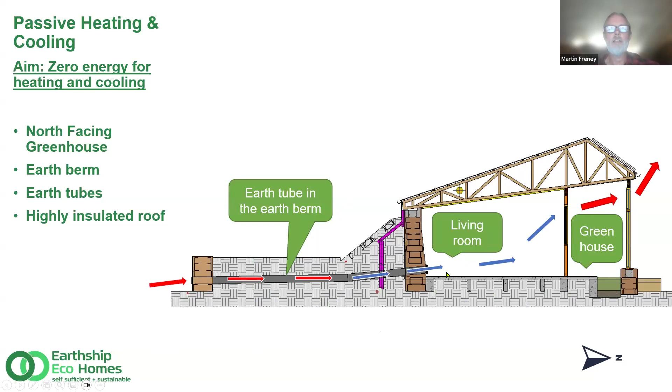So here in cross section, you can see basically as it gets warm in the greenhouse and the hot air escapes out of an open window, that draws fresh air in through the tube into the living room. I've recorded 22-degree air coming in here on a 42-degree day, so you can get about 20 degrees of cooling with this earth tube system.

The other concept with the Earthship is that the greenhouse and the earth berm act as buffer zones. This means the living space is buffered from external temperatures. The soil stays at a stable 20 degrees, and the greenhouse is always milder than what's going on outside. This leads to buildings that basically do not need heating and cooling at all.

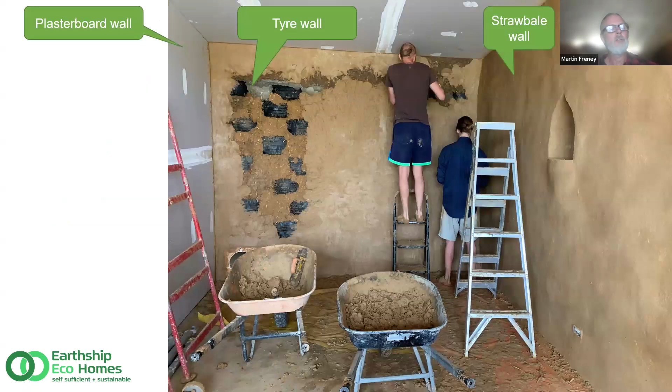The other interesting thing about earthships is that they're built by volunteer labor. Volunteers sign up to help build the tire wall, and it's a really easy system to learn. That also applies to the earth rendering technique - you can see the earth render going over the tire wall, and on the right, a straw bale wall with earth render on it. We also used plasterboard for ceiling and wall. These construction methods can all be combined, and using the appropriate materials in the appropriate places leads to a really good outcome. There's the finished rendered tire wall.

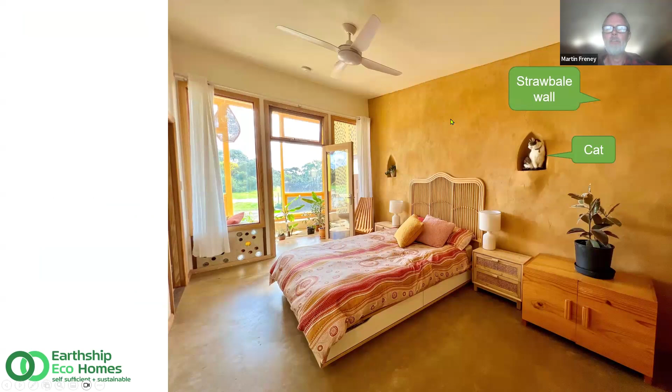The fire has not been needed due to that sunroom and earth berm. There is the straw bale wall. One of the really cool things about straw bale walls is you can carve niches into them because they're so thick. We also upcycle bottles in earthships - entirely optional, but sort of a very cheap brick, and it's building air into your wall, which is insulative.

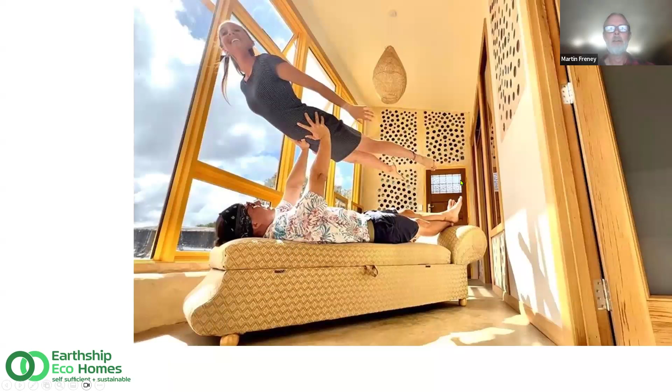There's Amy, the happy owner, and there are a couple of YouTube clips there that you can click on - they're both links to learn more about that building.

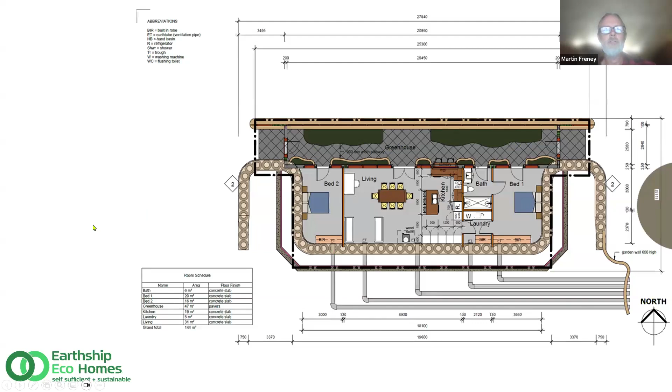It's been owner built. Moving on now to renovation ideas, the real quick and easy thing to do is draft sealing. For probably under $100 at the hardware store, you can get sticky back adhesive strips to put on your windows, weather seals for your doors, and this is going to stop the drafts. This is a big deal - Australians live in really, really drafty homes. Dealing with this problem is a great first step. If you're doing a new build, make sure your windows and doors have these seals built into them.

Ceiling insulation, of course, I think everyone knows about this by now - that's a really important thing to do. My tip would be to actually exceed what the code says. The code might say to go for R5 in the roof; I'd try to go for R6, 7, or 8 if your budget permits and if there's space.

Double glazing - I gave you the example of the magnetite retrofit, or if you're not happy with the magnetite, then install double glazing. These are all relatively quick and cost-effective upgrades.

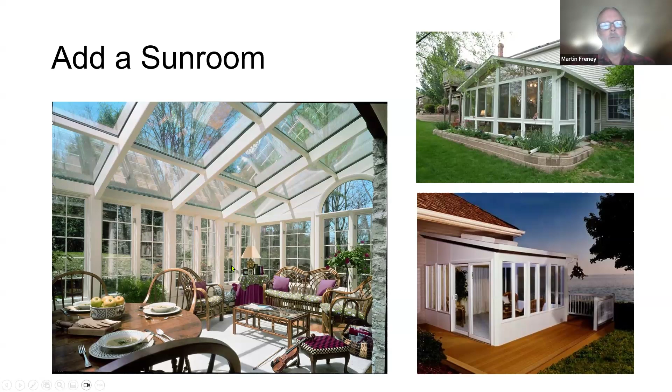I just feel like that's really sensible to combine those two ideas. If you needed a second or third bathroom, you could incorporate that also at the end of the sunroom.

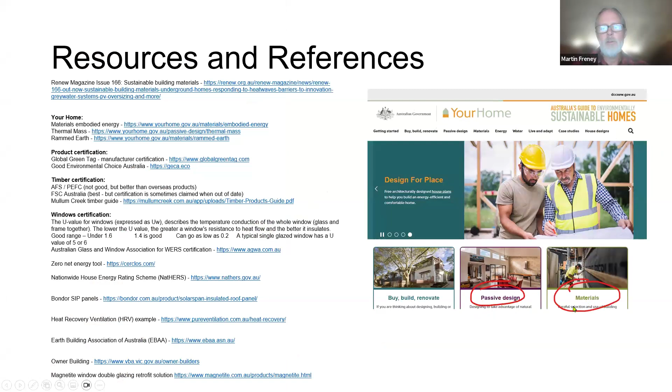In conclusion, there's no perfect solution for all sites and all people. It's context specific to your climate, your budget, and all sorts of other things. So you really need to work closely with your designer or architect to tell them what sort of materials you like, and what's your philosophy on environmentalism. Are you an absolute tree hugger like me and want to go all the way, or do you want to just do a little bit here and there? That's of course your call, and you need to let your designer know about that.

And from there, you'll co-create that design and figure out what these materials are. Of course, you can dramatically reduce the cost of your home by building small and efficient, and you can also dramatically reduce your eco footprint by thinking about these life cycle stages.